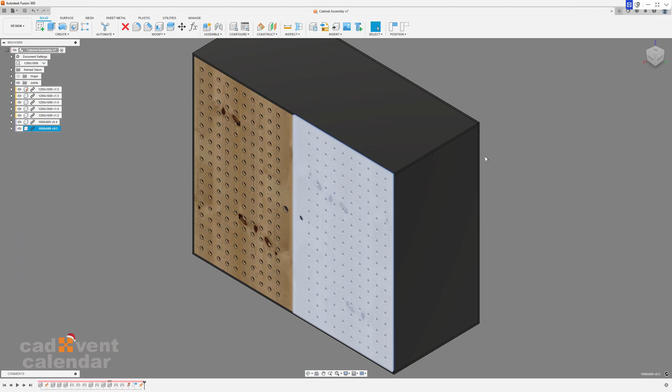One thing that we see very often in the product design and manufacturing space is the amount of potential for rework that we have in different design teams. For instance, we're making a product and we want to make one that's a bit bigger or a bit smaller, or a different material, different finish. These things zap time when they really don't need to.

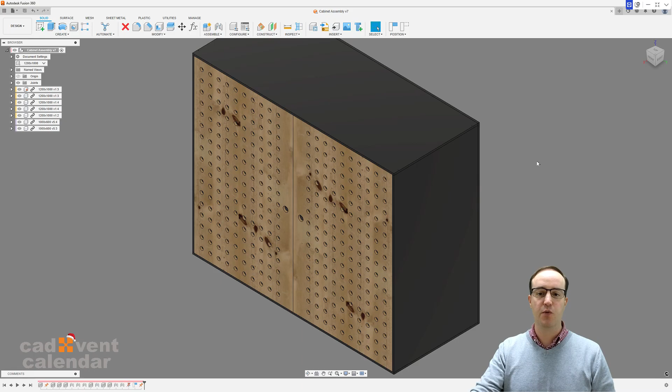For a few months now, Fusion 360 has had the ability to work with table-based configurations, allowing us to drive those parametrics that we saw way back in video 1, but via a table, meaning that we can configure several configurations which we can instantly change between. For example, in this cabinet, I can open my configuration tools and I can just double click any entry within the table to change the configuration.

Fusion does this by having a configuration name that is linked to a different configuration within each of these individual parts. We set the configuration that we want to be linked in each part to drive them individually. It's really quick and easy to work with as well.

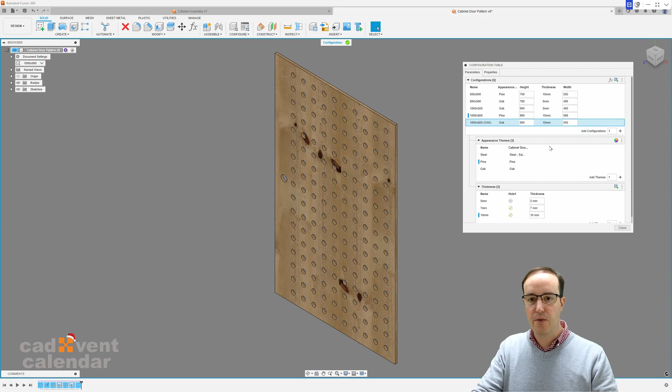So if I open up this individual door file, change the configuration in here to maybe have a 1000 by 600 door that is in oak as well as pine, we can simply come in and change. Helps if I spell it correctly. We can come in and change our configuration within the individual file to work with oak. All I need to do, check that works, and then save the file.

Once the file is saved, Fusion 360 will do its parametric thing and update everything. So if I now go back into my configurations at the assembly level, I could grab where that door is used, for example in the 1200 by 1000 configuration, and I could change that and have an oak door version. And then this door uses the oak configuration.

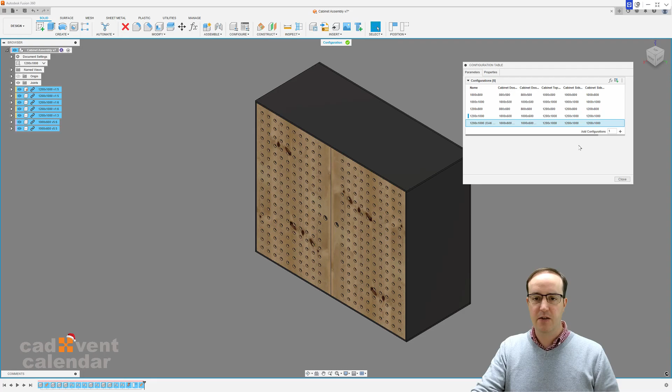Again, dependent on the complexity that you have and the type of model, some of these may take a couple of minutes to populate. But if I now go and have a look at what that's done, I now have my original customizations and configurations and my oak doors. It's that easy to start creating table-based configurations and driving them inside of Fusion 360.

Again, remembering how accessible this is from a subscription perspective, how modern and easy this tool is to use, to start having some of the power that really high-end product design and manufacturing applications have that are 2, 3, 4, 5 times as much as this product. It really does astound me. So this is fantastic. It's easy to use. You should check it out and have a go at those configurations today.